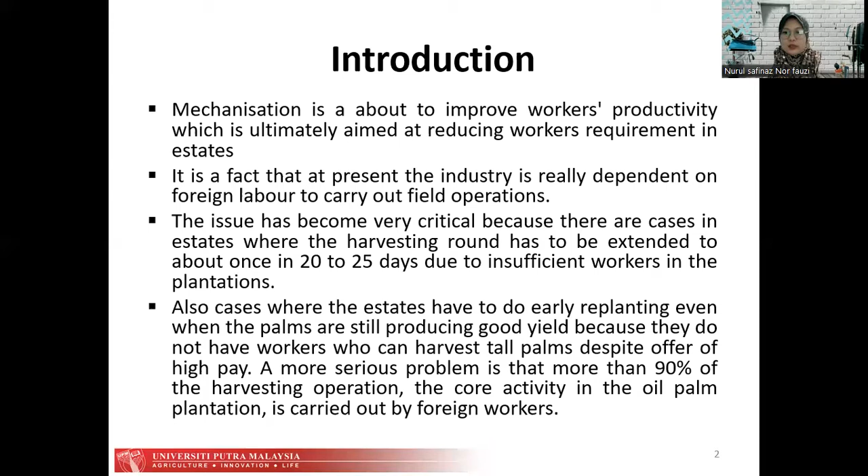Oil palm mechanization: efforts to increase workers' productivity by adopting new methods and technologies are being implemented and enhanced in the industry. There are three elements that contribute significantly to productivity of the workers: tools, work system, and labor, which need to be well synergized in order to achieve optimum productivity. With the right tool, effective work system, and trained operator, maximum output can be derived.

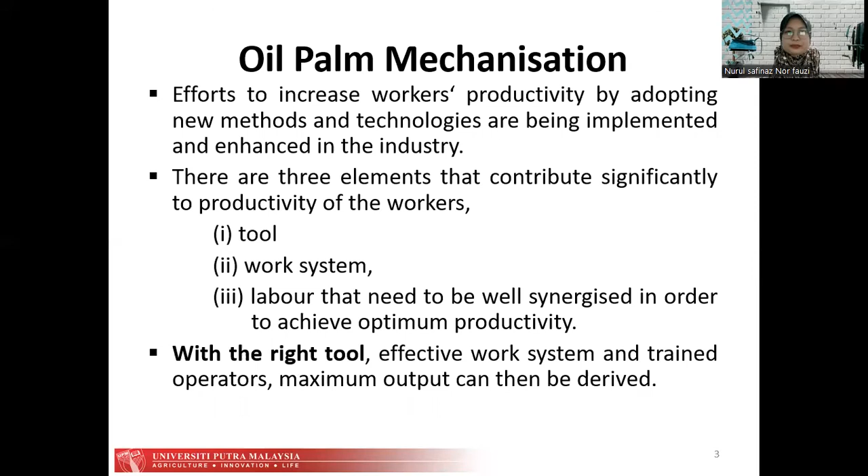Mechanized harvesting of fresh fruit bunch. Efficient harvesting can be achieved by using efficient harvesting tools and sufficient harvesters to cater to the harvesting round at the recommended 10 to 12 day interval. Difficulty in getting skilled harvesters has been a real issue that demands effective solutions. Manual harvesting using a sickle or chisel can only produce an average of 1 ton FFB per worker per day.

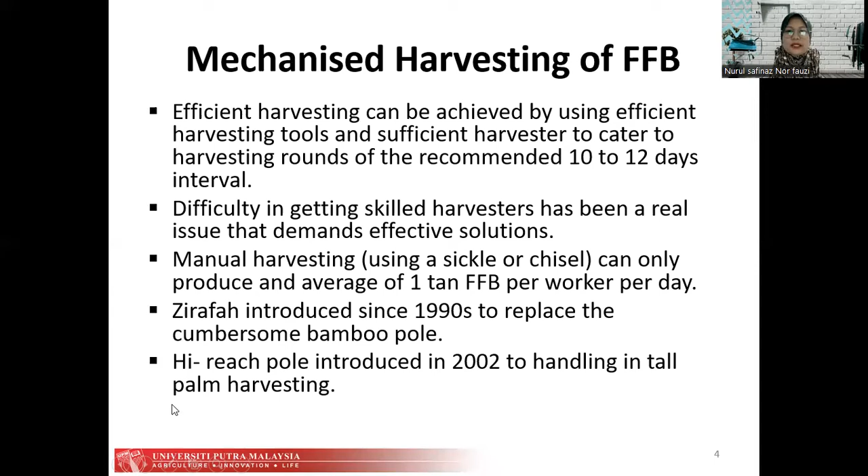The Zirafah was introduced since the 1990s to replace the cumbersome bamboo pole. The high-reach pole was introduced in 2002 for handling tall palm harvesting. Next is the oil palm motorized cutter, Cantas, introduced in 2007, suitable for harvesting FFB from palms up to 5 meters harvesting height, and was able to increase harvesting productivity by more than double.

Cantas benefits smallholders, individual harvesters, contractors, and estates in terms of increasing productivity and income, and reducing workers and operational costs. Cantas is a motorized cutter specifically designed for harvesting FFB and cutting fronds. It is powered by a small petrol engine and utilizes either a specially designed C-sickle or chisel as the cutting knife. MPOB is the technology owner, with the patent filed in Malaysia, Indonesia, Thailand, Brazil, Costa Rica, and Colombia.

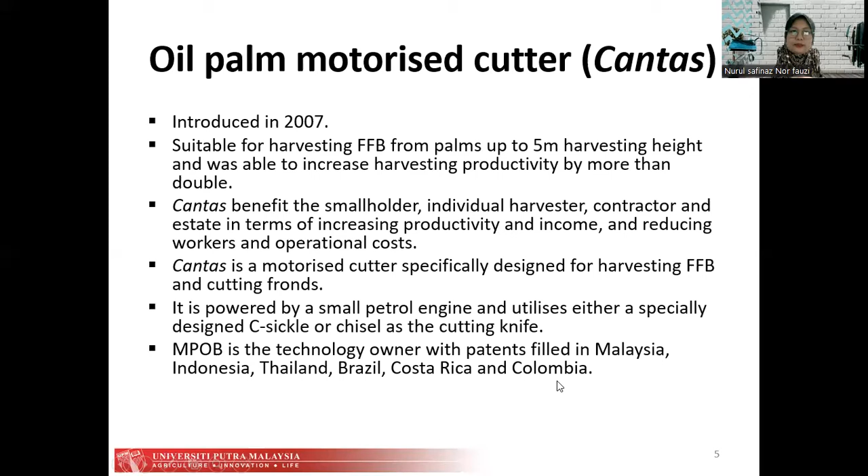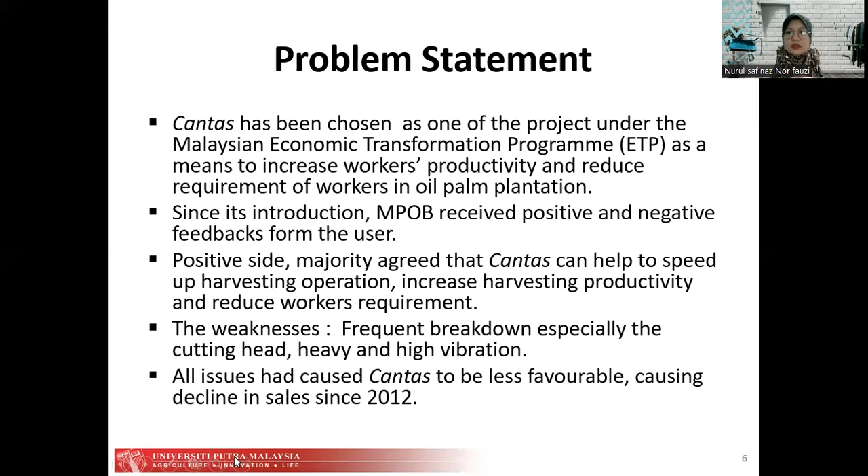On the journal problem statement: Cantas has been chosen as one of the projects under the Malaysian Economic Transformation Program (ETP) as a means to increase workers' productivity and reduce the requirement of workers in oil palm plantations. Since its introduction, MPOB received positive and negative feedback from users. On the positive side, the majority agree that Cantas can help speed up harvesting operations, increase harvesting productivity, and reduce workers' requirement. The weaknesses include frequent breakdown, especially of the cutting head, heaviness, and high vibration.

These issues had caused Cantas to be less favorable, causing a decline in sales since 2012. So the main objective of this journal is high quality and durability, less breakdown, with repair cost below RM1 per ton of FFB, generating vibration below 2.5 m/s according to the ISO 5349 standard, and having a specific weight below 1.5 kg/m.

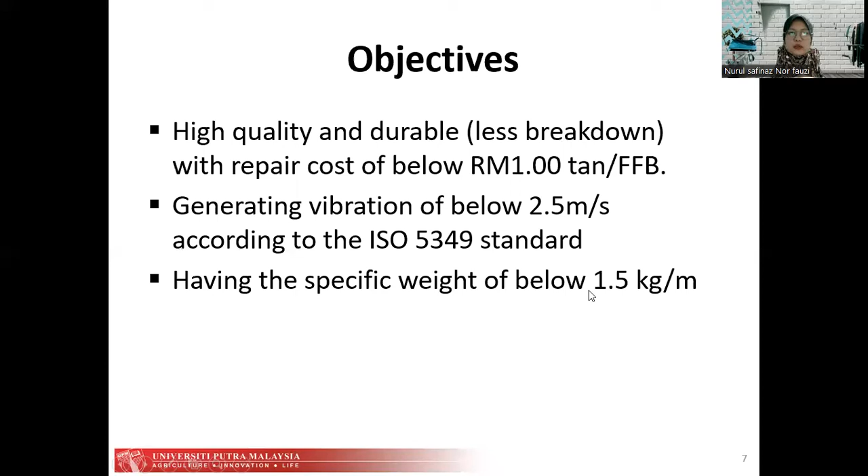The study location: the field trial is a long-term evaluation conducted in a commercial plantation to assess the machine performance and repair costs. The trial was carried out in Bousted Kuala Muda Estate in Baling, Kedah, Malaysia, which is the same place where the benchmark data on the previous version of Cantas was taken.

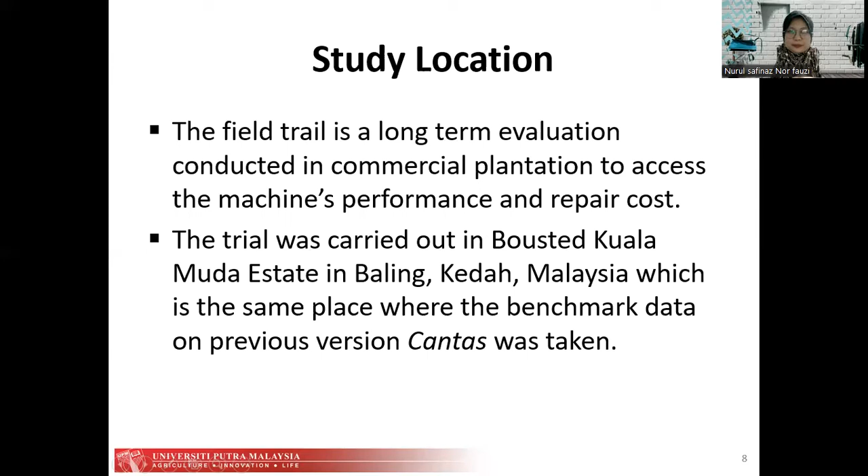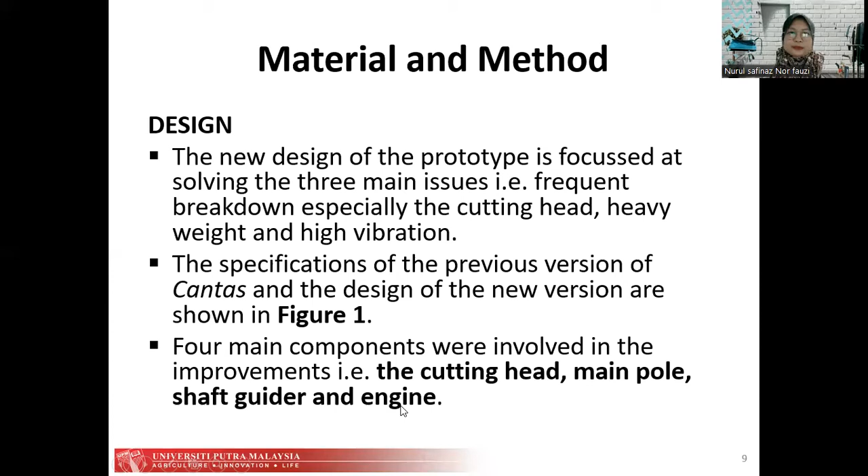The cutting head: old specification is offset, single bearing, stroke 10 mm, while the new specification is inline, double bearing, stroke 6 mm. I will discuss this after.

The main pole: old specification uses aluminum alloy, new specification uses composite carbon fiber. Shaft guider: old specification single bearing, new specification uses double bearing. For the engine, old specification uses a China engine at 3.8 kilos, and the new specification uses a Zenoah Japan engine at 3 kilos only.

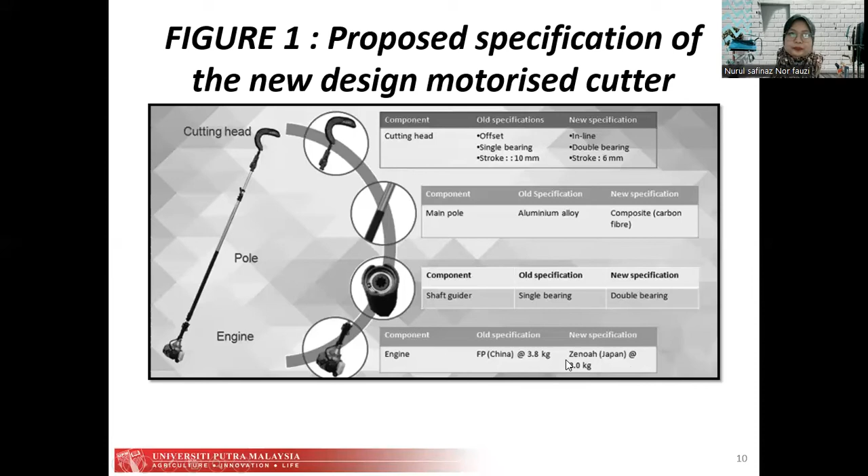This is what they did to improve the cutting head and reduce vibration. The cutting head must be strong and robust to overcome the toughness of the oil palm fronds and fruit stalk, and to withstand rough handling by the harvester. High-speed movement causes severe wear and tear on moving parts, especially components that rub against each other. Rough handling by operators is another factor that can cause machine breakdown.

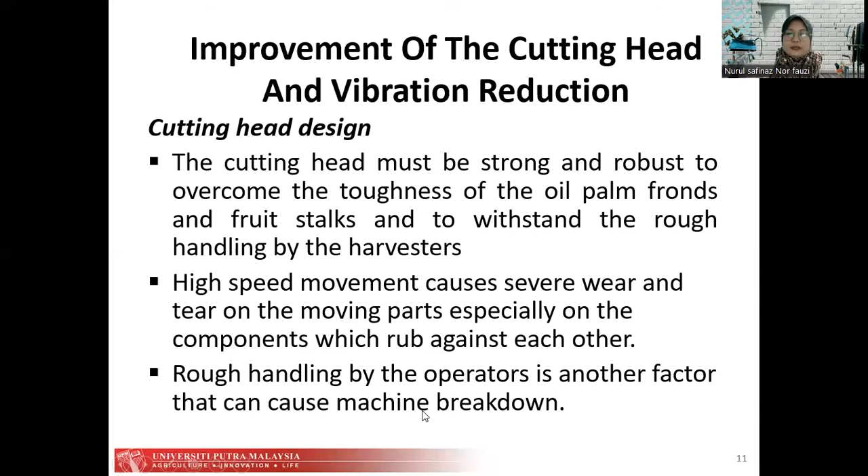In the new cutting head design, several elements were considered: the use of a double bearing system on both sides of the main gear improves stability of the gear, as I will show later. A single bearing system, as in the old design, only provides support on one side of the main gear, which causes the gear to run off during rough harvesting operation.

The new design has an inline cutting force that generates low vibration, compared to the old design's offset cutting line, which generates higher vibration.

This is the cutting action as proposed in the new design, shortening the stroke distance from 10 mm to 6 mm, which lowers the magnitude of vibration during operation. They also changed the material from cast iron to high quality metal to improve strength on certain components, especially the connecting rod.

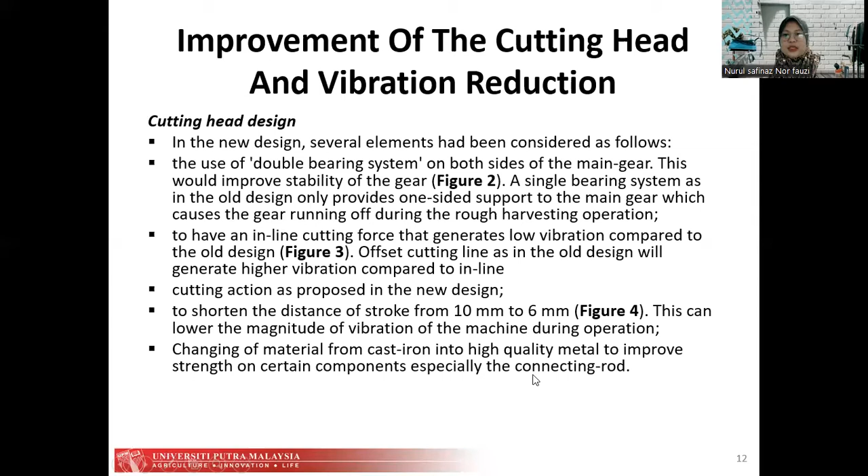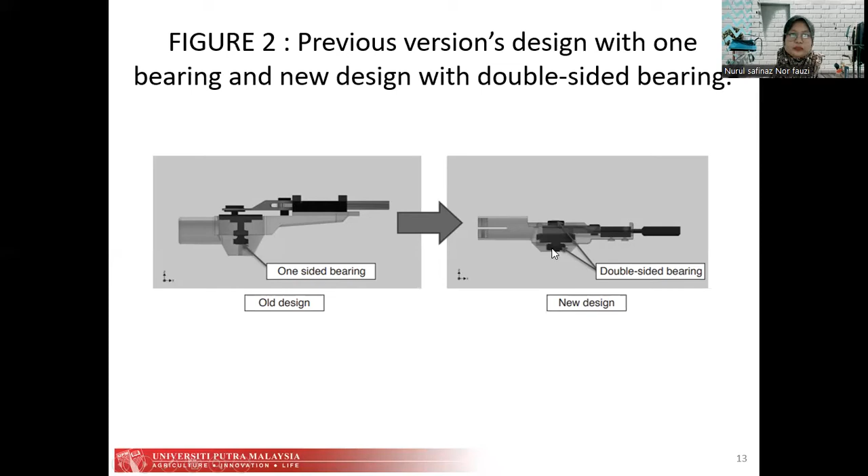This is the previous version design with one bearing, and the new design with double-sided bearing. This one shows the previous version with offset cutting action and the new design with straight cutting action.

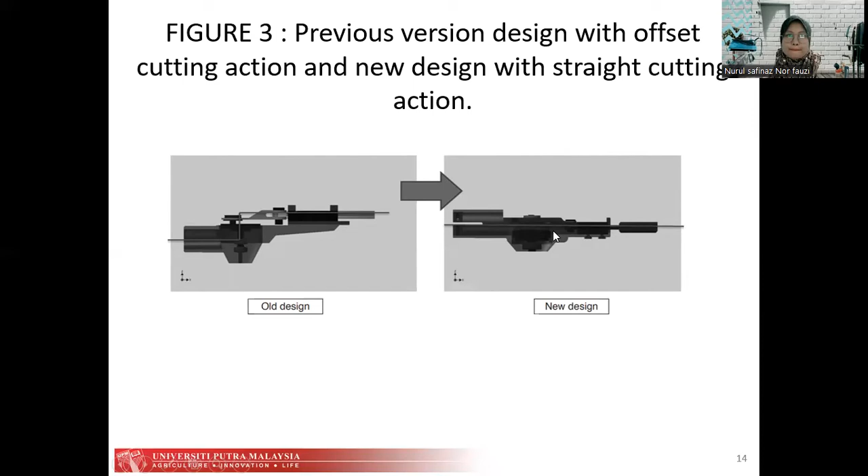This is the design, showing the displacement of the old design versus the new design. The old design displacement is almost 10 mm, while the new design is only 6 mm—they reduced it.

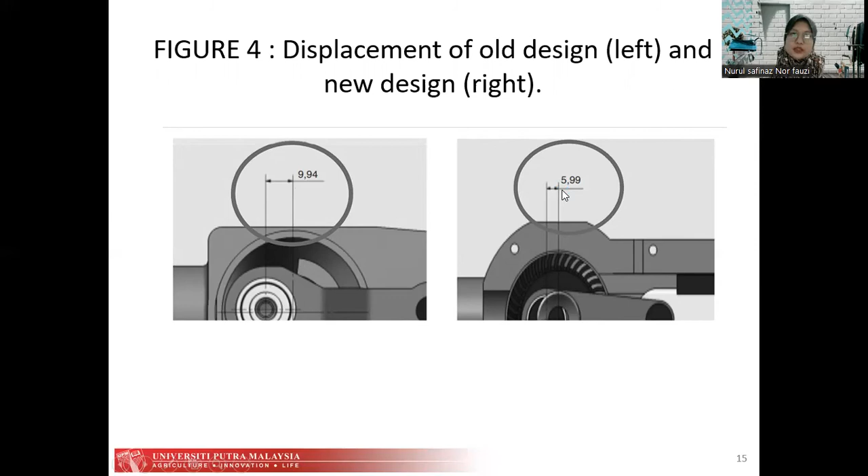Next is the shaft guider. Shaft guiders are placed inside the main pole to hold and guide the shaft to rotate smoothly, transferring rotational power to the cutting head efficiently. Unbalanced shaft rotation generates high vibration that is transferred to the pole.

The previous version employs a single-sided bearing on the shaft guider that generates high vibration during rotation. In the new design, two side bearings are installed on the shaft guider, providing better and steadier stability that reduces vibration during rotation.

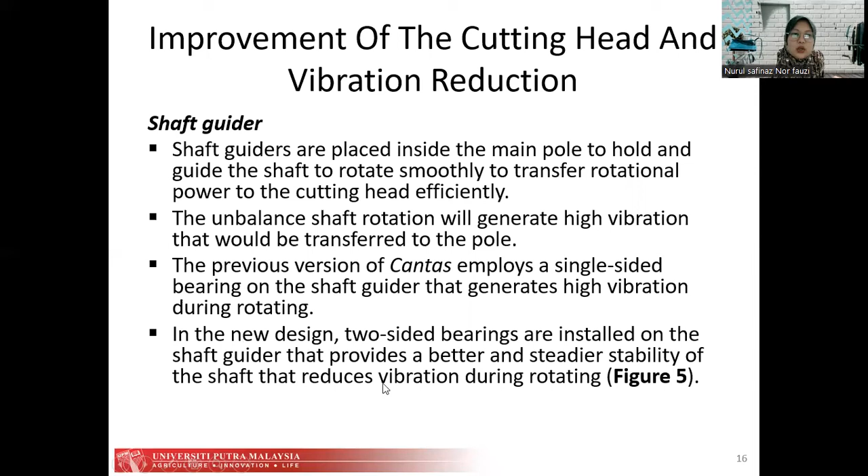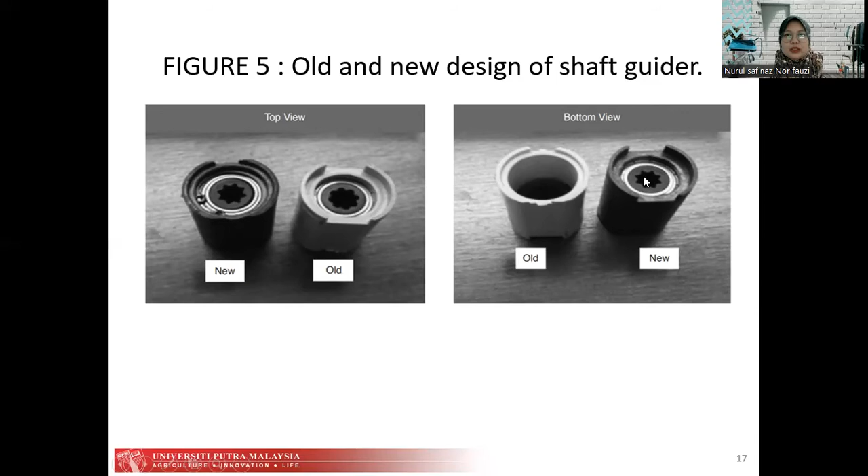This is the old and new design of the shaft guider, from the top view, old and new. The bottom view of the old design doesn't have any bearing, while this is the new bottom view.

For weight reduction, they made an amendment to the pole design. The pole has been designed with an oval shape to increase the surface contact area, providing a firm hand grip during handling. The cross-section dimension is shown in Figure 6.

The oval shape increases stiffness on the y-axis, which is crucial in the lifting operation to ensure the pole does not bend excessively. The ratio of y to x-axis is 1.14.

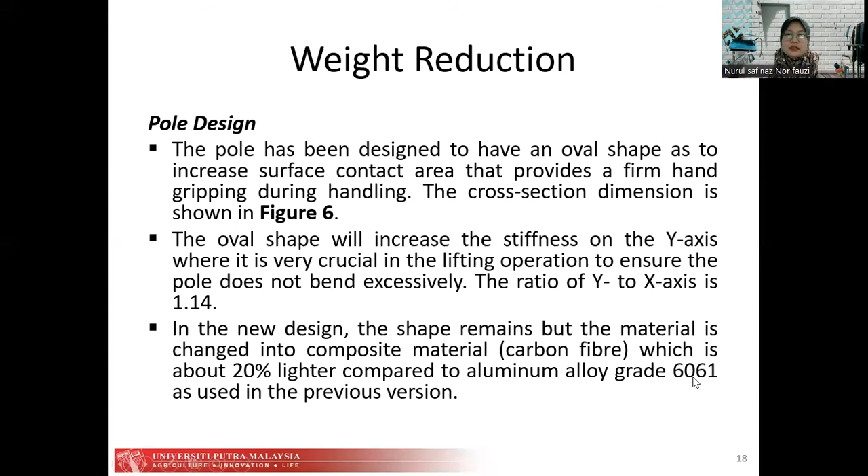Next is the engine. The previous version of Cantas was powered by a two-stroke petrol engine with horsepower between 1.3 to 1.5. Various engine models were mostly imported from Germany, Japan, USA, China, and Sweden, with weight ranging from 3 to 3.8 kg.

The new design uses a smaller engine, 1.1 horsepower, with a maximum RPM of 11,000, weighing only 3 kg. With this engine, the weight is reduced by 21%.

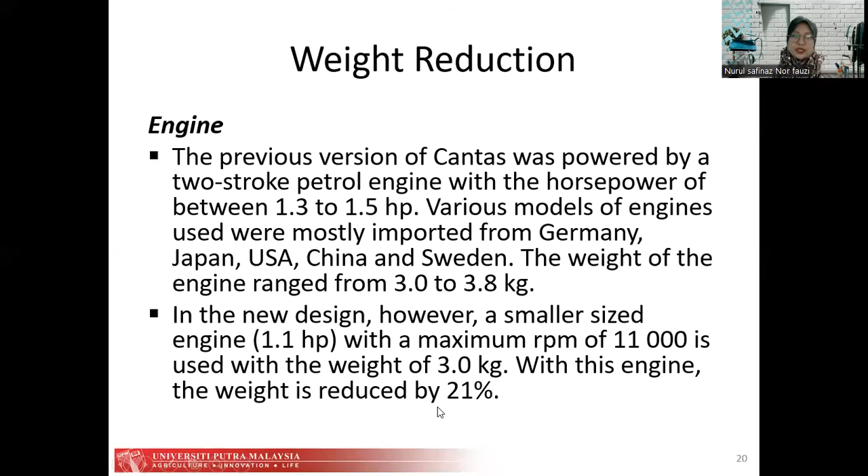Weight and reach: the weight of Cantas is proportionate to its length. The weight gets heavier when the length is increased. For Cantas to be effective, the specific weight should remain low, but the stiffness should be set higher. High stiffness will reduce pole deflection, where the combination of high stiffness and low weight can craft the pole to be made longer for higher harvesting reach.

Several approaches have been identified to reduce weight: using a lighter but stronger material such as aircraft aluminum grade alloy, composite, as well as polymer material; reverse and re-engineering of several components such as the cutting head, pole and transmission system; and having a lighter engine but equivalent power.

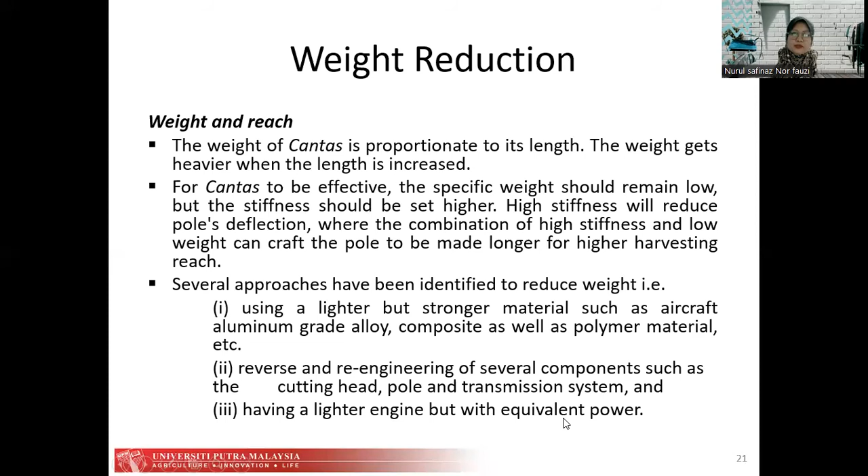Next is the prototype of Cantas Evo. The new prototype, the new generation Cantas, is shown. The new version is called Cantas Evo.

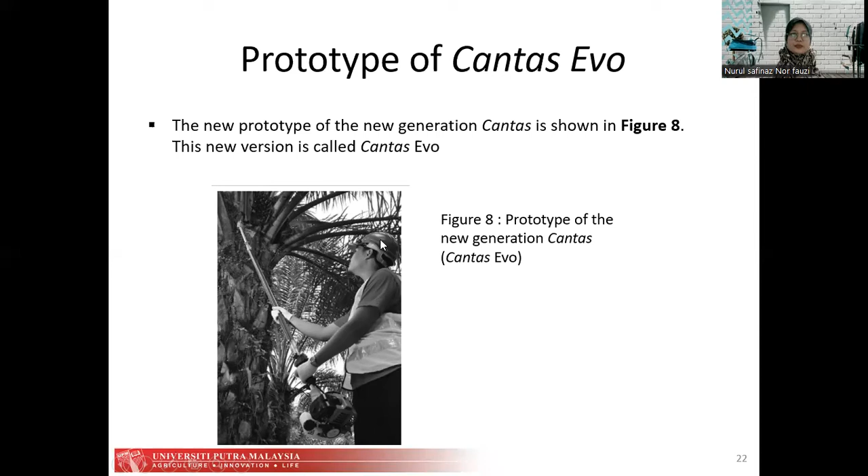This is testing and data analyzing. The Cantas Evo will be tested in the quality test. The quality test was conducted to ensure the prototype meets the quality standard. The machine has to go through and must pass the following quality tests prior to field test, final specification and mass production for commercialization.

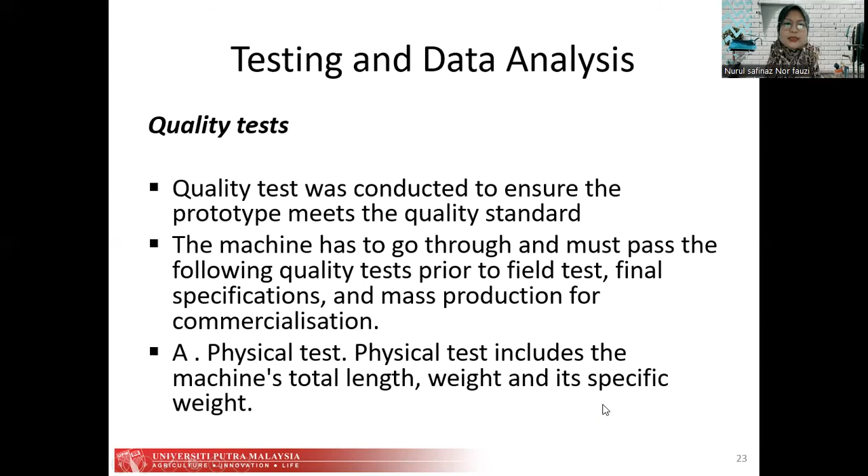So they have a few tests. First is the physical test, which includes the machine's total length, weight and its specific weight. Number two, the functional test, which verifies whether the machine can do the job as designed. The machine was tested to cut at least 10 oil palm fronds with cutting time recorded. It must be able to cut a frond smoothly without much problem.

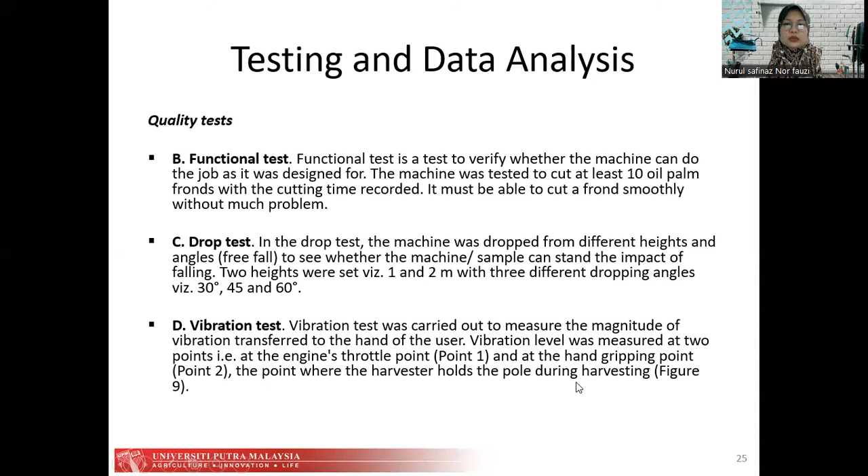Last is the vibration test. Vibration test was carried out to measure the magnitude of vibration transferred to the hand of the user. Vibration level was measured at 2 points: at the engine throttle point and at the hand gripping point, the point where the harvester holds the pole during harvesting. This is point 1, and this one is point 2, where the harvester grabs the pole.

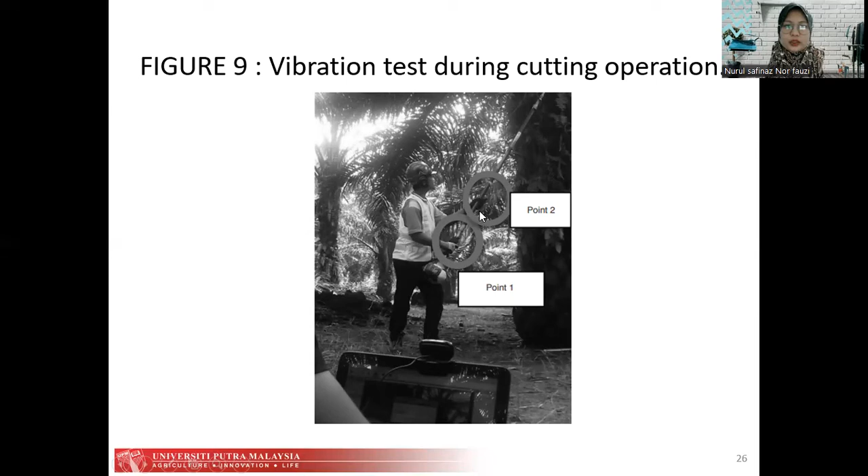Result and conclusion for the quality test: the physical test conducted shows that the specific weight of Cantas Evo is 1.45 kilos compared to 2.11 kilos for the previous version of Cantas, proving that Cantas Evo is lighter by 31.3%. The functional test: a total of 23 fronds and 10 FFB were cut from 10 palms. It was witnessed that the machine was easy to handle, easy to perform cutting operation, and the sickle was sharp.

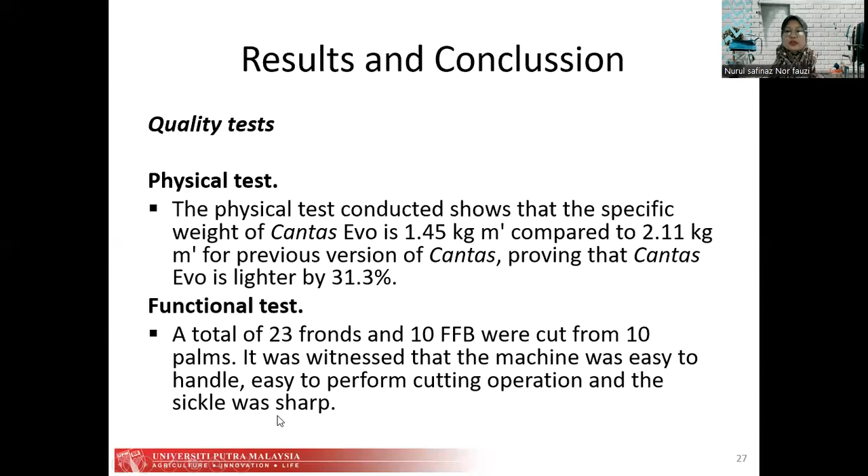Drop test experiment carried out proved that the machine was tough with no break, dent or malfunction on any parts of the machine.

Vibration test for Cantas Evo: the vibration levels at point 1 and point 2 were 0.6 and 0.4 respectively, while for the previous version of Cantas, the vibration levels at point 1 and point 2 were 9.8 and 10.2. Therefore, the vibration levels of the previous version of Cantas were above the EAV value of 2.5, as per ISO 5349, mechanical vibration measurement and evaluation of human exposure to hand-transmitted vibration. The test has proven that Cantas Evo is safe to be used for a period of 10 hours working a day.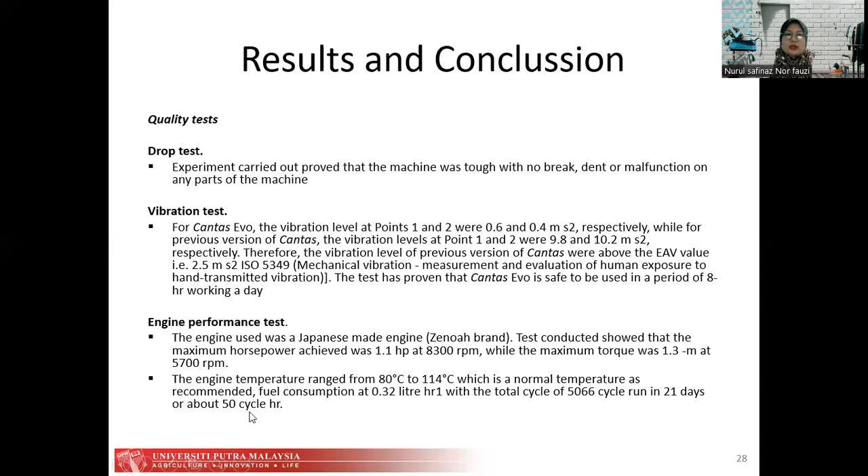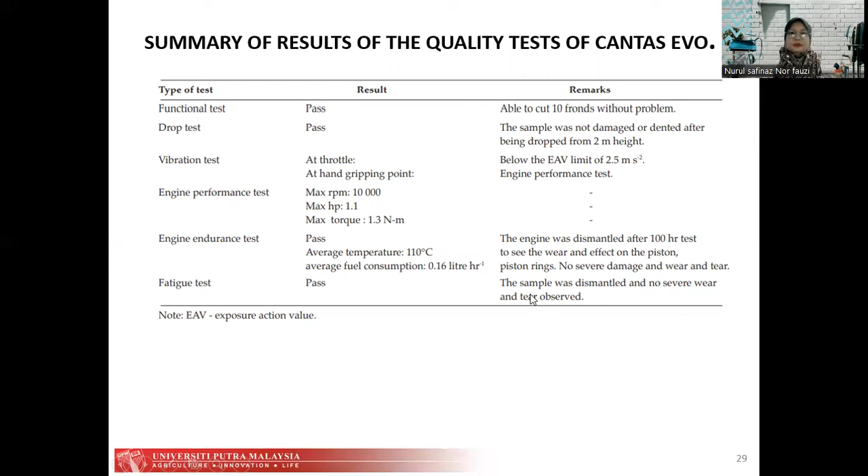I would like to express my deepest gratitude to my lecturer, Dr. Ahmad Suhaizi Mat Su, for his knowledge and expertise shared with me. I am also grateful to my classmates for their feedback, sessions, and moral support. Lastly, I'm also thankful to my family, especially my parents, spouse, and my child. Their belief in me has kept my spirit and motivation high during this process. Thank you very much.